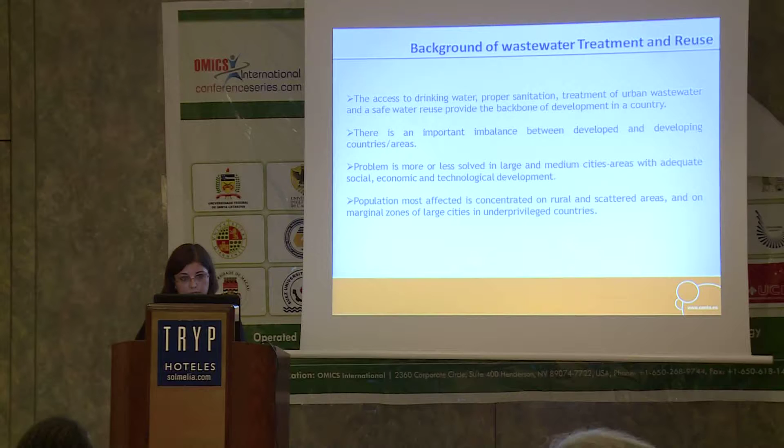Access to drinking water, proper sanitation, treatment of urban wastewater, and safe water reuse provide the backbone of development in a country. But there is an important imbalance between developed and developing countries or areas.

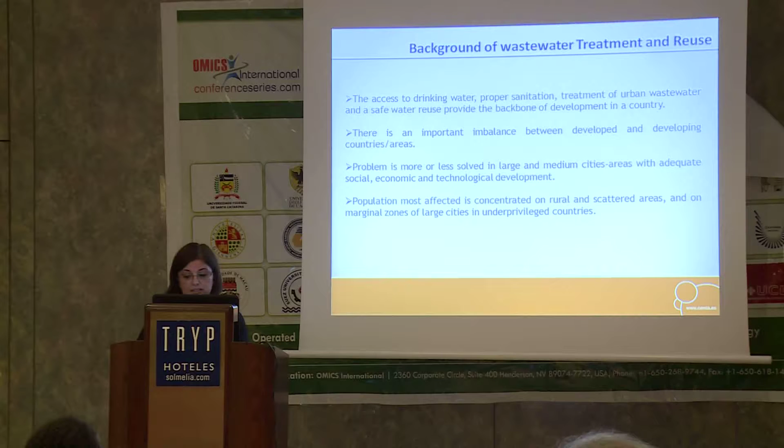The problem is more or less solved in large and medium cities or areas with adequate social, economic, and technological development. But unfortunately, the population most affected is concentrated in rural and scattered areas, or surrounding large cities in underprivileged countries.

If we analyze in detail this situation, for example in large urban communities of developed countries, we have high coverage in sanitation and hygiene. This is very important - availability of infrastructure for wastewater treatment, water reuse, and water reclamation, with good quality water resources, where pollution issues are primarily concerned with amenity values and toxic substances.

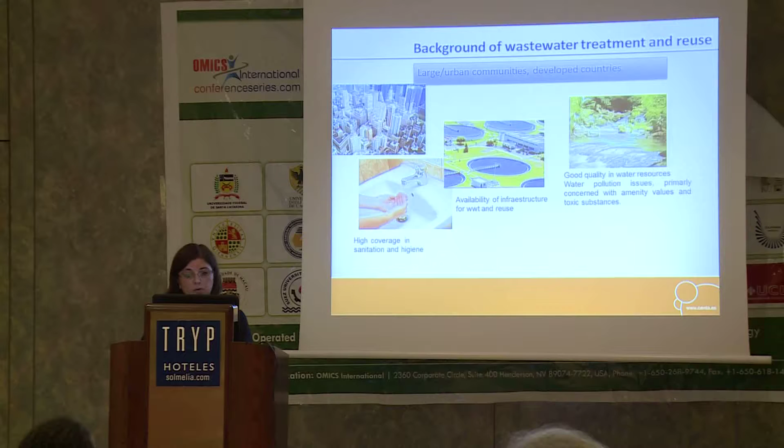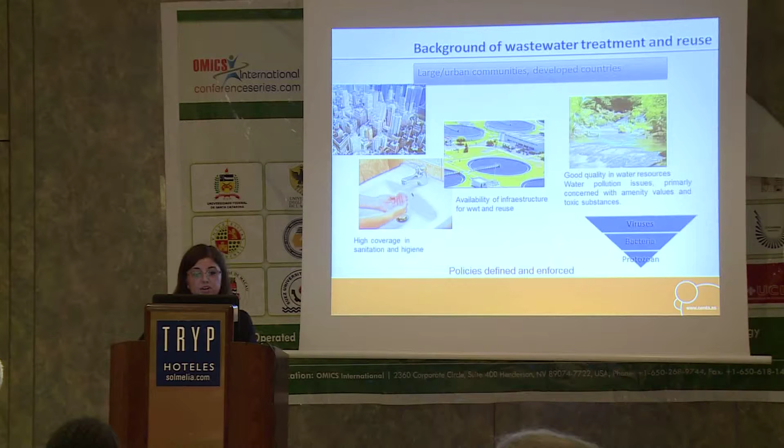If we analyze the health risk related to pathogens in this kind of wastewater, there is a predominance of virus compared to other pathogens. And it's very important that policies are defined and enforced.

If we analyze the opposite situation - small rural communities in developing countries - we have an additional problem: water scarcity that seriously limits food production, along with inadequate sanitation, wastewater treatment plants, and wastewater reclamation plants, causing quality degradation in water resources that produces a risk for public health.

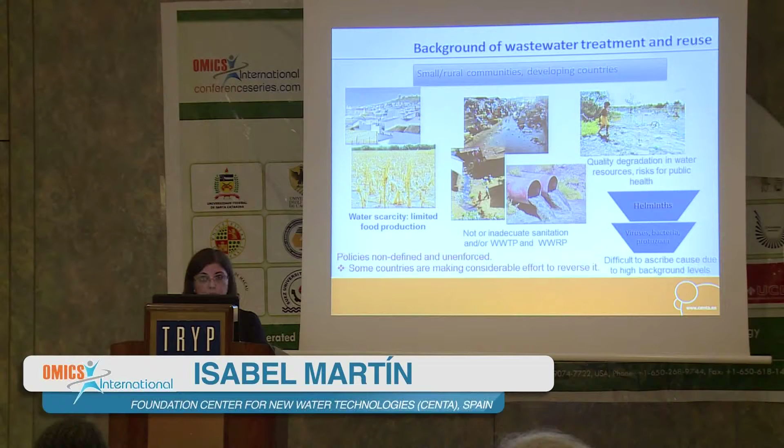When we analyze the pathogen situation, there is high prevalence and persistence of intestinal worms, as well as the presence of virus, bacteria, protozoan, etc. There is a difficulty to ascribe the cause due to high background levels. Related to policies, these are not defined and enforced.

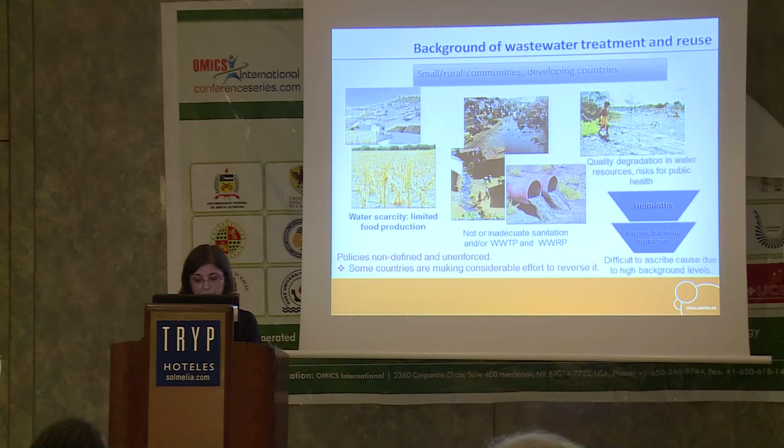Also, there are some countries making a considerable effort to reverse this situation. In the frame of water reuse, I would like to remark on the forecast for water resources.

If we analyze the prediction for the future in water resources, there is a prediction that by the year 2050, approximately 54 countries will be affected by water scarcity and water stress.

So in this context, more and more countries are including water reuse as an additional water resource. For example, in this graphic you can see that there are some countries, such as emerging countries like China or Mexico, or India, that are including water reuse in their water resource management plan.

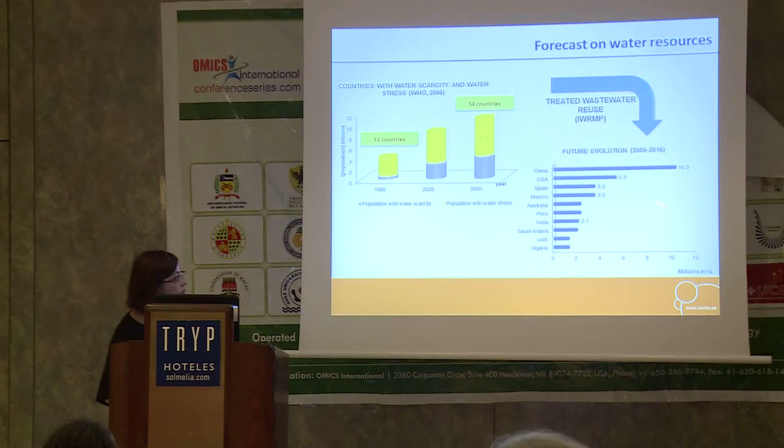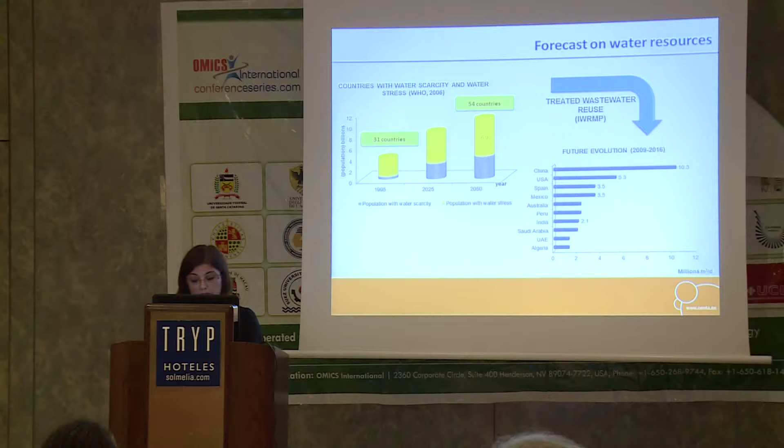Which technology options do we have for wastewater treatment in small communities? First, I would like to introduce a consideration about the characteristics of the wastewater in this kind of agglomeration.

This agglomeration presents high community dispersion, and this produces complexity in infrastructure management. This is a problem when you have to design and implement a wastewater treatment plant in this kind of small community.

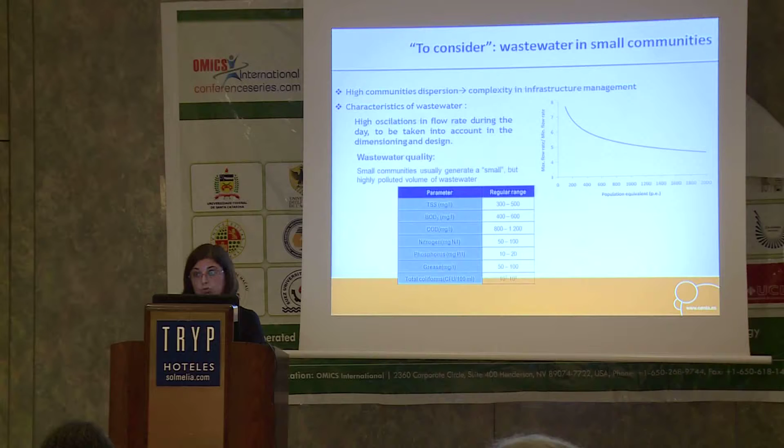Related to the characteristics of this kind of wastewater - in these small settlements a small flow is produced, but it is very, very polluted. So which kind of technology can we propose?

When we are in the frame of small communities, we can work with two kinds of technologies: intensive technologies, such as extended aeration, etc., and extensive or non-conventional technologies. What is the principal difference between these kinds of technologies? The difference is really in the high energy consumption and in the implementation surface.

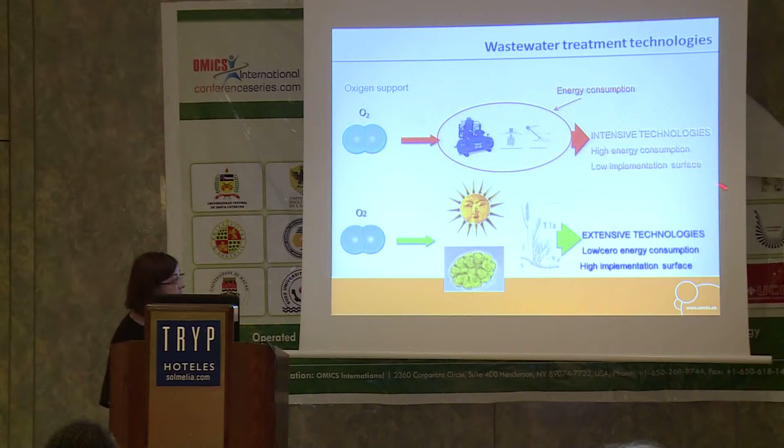For example, intensive technologies like extended aeration present high energy consumption - it's a negative point, but they have a very positive point: low implementation surface. In the case of extensive technology, they need low or zero energy consumption, but they have a very negative point - high implementation surface.

So, most existing wastewater treatment technologies are applied to small settlements, although some will be more adequate or appropriate than others. But really, do we learn from this?

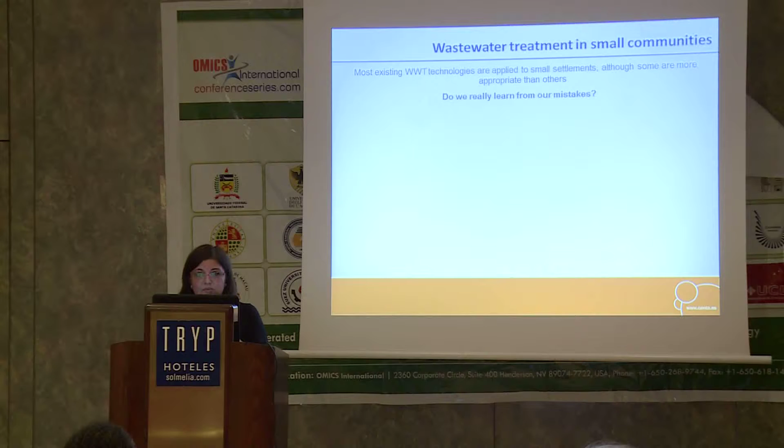Do we really learn from our mistakes? No. Not only in Spain, but all over the world, commonly in small settlements, technologies with high treatment cost have been implemented. For example, you implement extended aeration, and for disinfection you implement ultraviolet disinfection - this is a possible option.

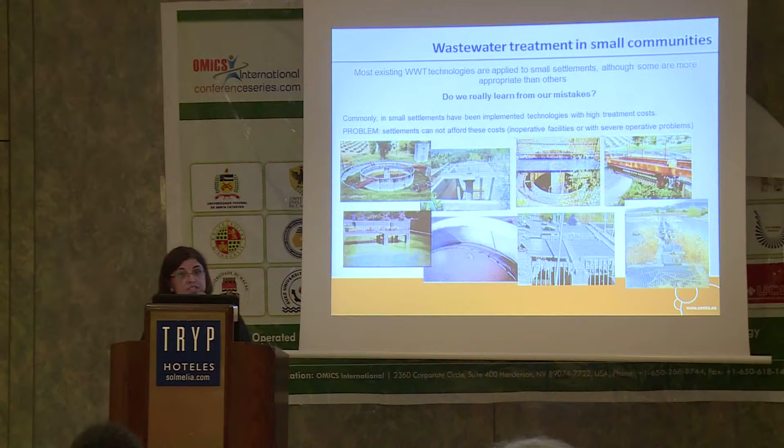What is the problem? The problem is that the settlement cannot afford this cost - it's impossible for them. So the result is an inoperative facility with severe operation problems. Here you have some pictures that I think are very common all over the world.

So which are the most sustainable technologies in the frame of wastewater treatment? Well, we have to look for technologies that follow some requirements: minimum operator time, minimum maintenance, efficient functioning, minimum power consumption, minimum loss of effluent quality, and maximum integration into the environment.

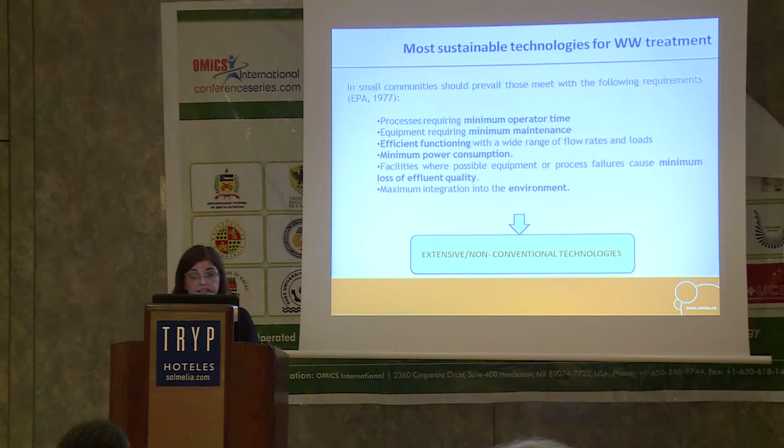So the wastewater treatment technologies that can meet these requirements are the extensive or non-conventional technologies. Now I will present in different slides the possible options for this kind of communities.

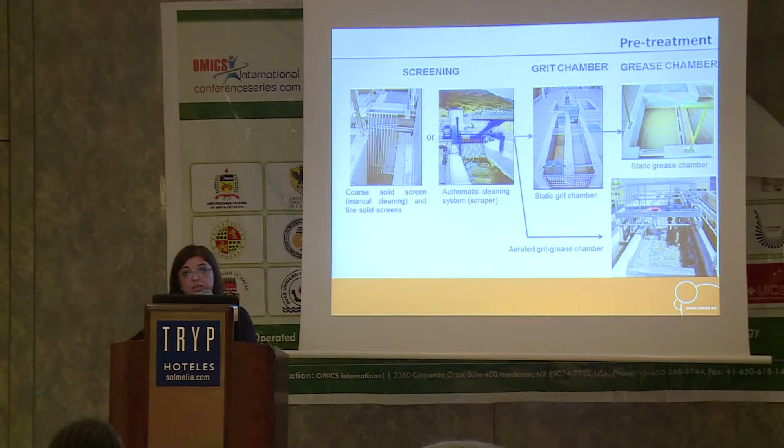In the pretreatment, the first phase of the wastewater treatment plant, is composed of the screening, the grit chamber, and grease chamber. In the screening, we have two options: screening with manual cleaning or with automatic cleaning. This will depend on the budget of the community.

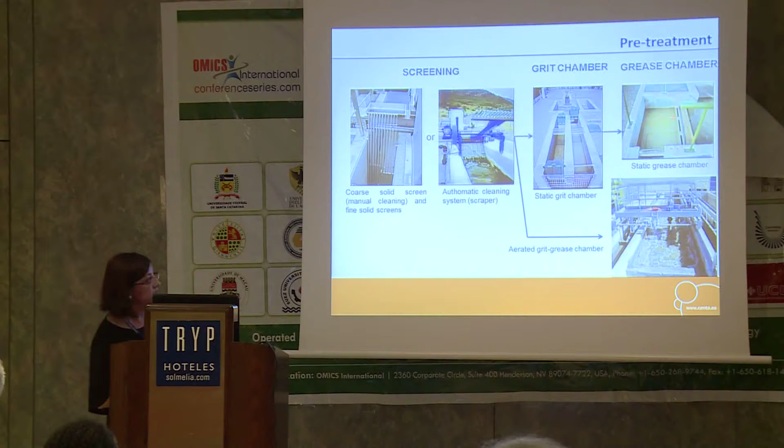Then we have a static grit chamber, very typical in small communities, and the static grease chamber, also very typical. But we have the option of combining these into an aerated grit-grease chamber.

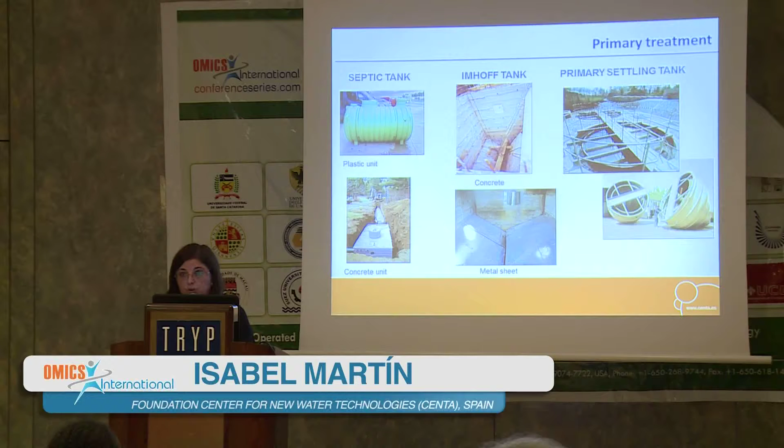The second stage in wastewater treatment, the primary treatment, has different options. For example, we have septic tanks as a plastic unit or a concrete unit. We have the Imhoff tank as a concrete unit or with metal sheets, or a primary settling tank.

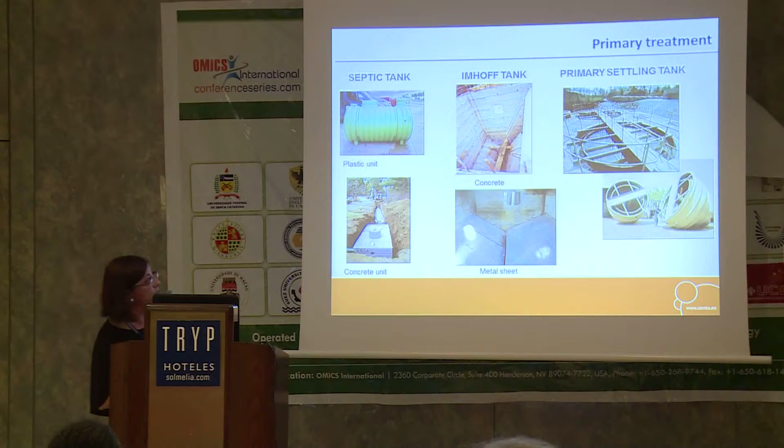About the secondary and tertiary treatment: in small communities, it's adequate to use non-conventional technologies. These extensive technologies are only imitating the natural processes that occur in the environment—imitating the soil, the river, lakes, or natural wetlands.

We introduce the treated wastewater. It's necessary that the wastewater be treated by a secondary treatment before flooding, and the wastewater percolates through the soil. Some physico-chemical and microbiological activities contribute to the wastewater treatment.

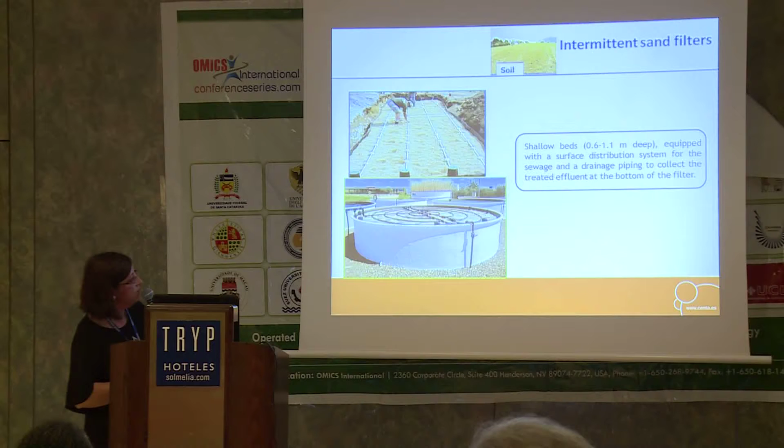Other technology: the intermittent sand filter, imitating the soil, has a shallow bed that presents a distribution system on the surface, and on the bottom presents a drainage piping to collect the treated wastewater.

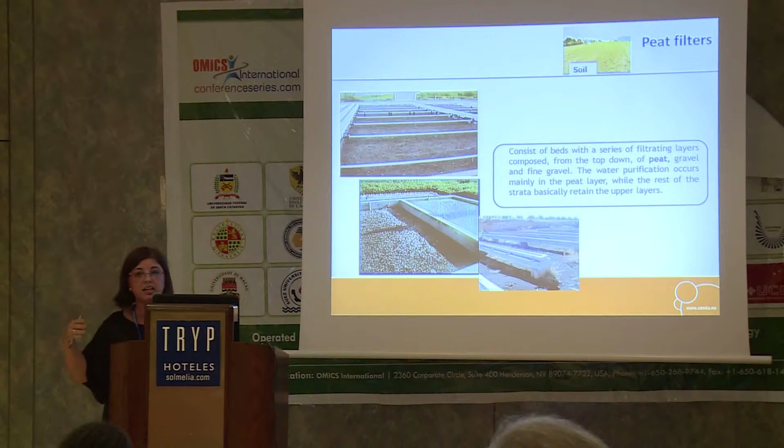A peat filter also imitates the soil. With the peat filter, we have to work with different units, and it presents different layers. On the top is the peat, where the wastewater treatment is produced, and then we use gravel, fine gravel, sand, etc., for supporting the peat.

Constructed wetland: this is a very common wastewater treatment in small communities all over the world. We have different kinds, with vertical flow, with horizontal flow, and the one most similar to natural wetland, the free flow or surface flow constructed wetland. Normally we use a substrate—gravel, fine gravel, sand, etc.—and we use macrophytes.

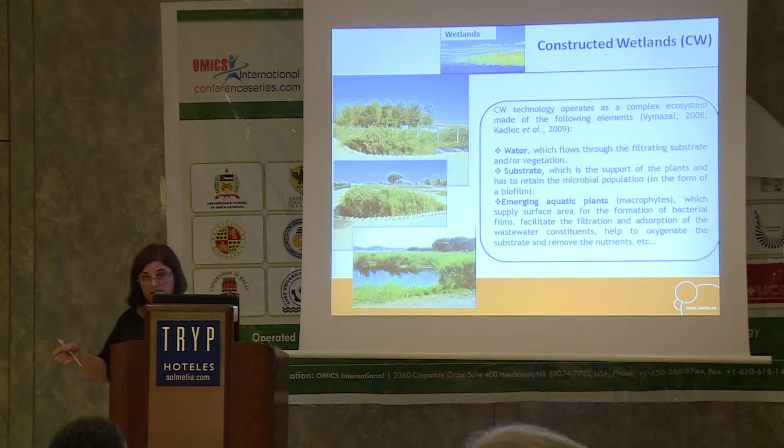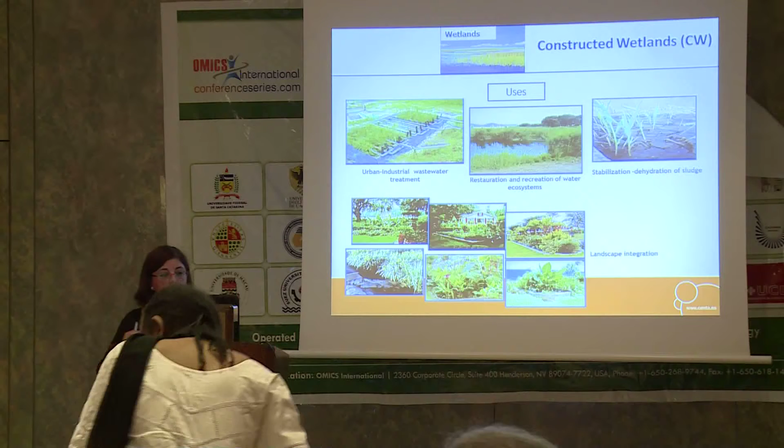Constructed wetlands have several options or uses. For example, we can use them for urban and industrial wastewater treatment, for restoration and recreation of water ecosystems, stabilization and dehydration of sludge, and they present very good landscape integration.

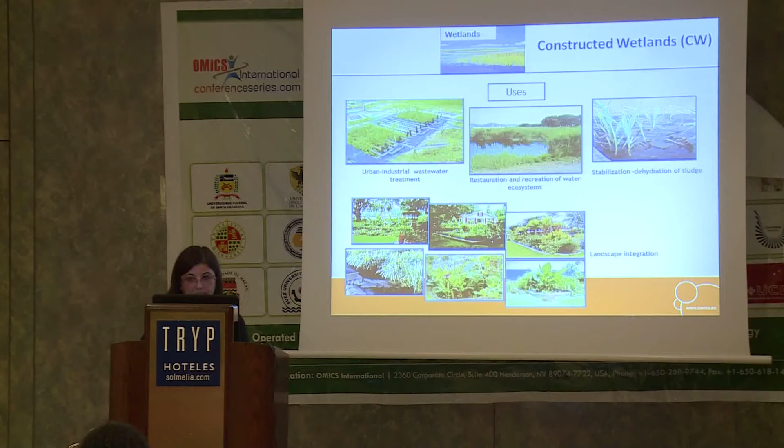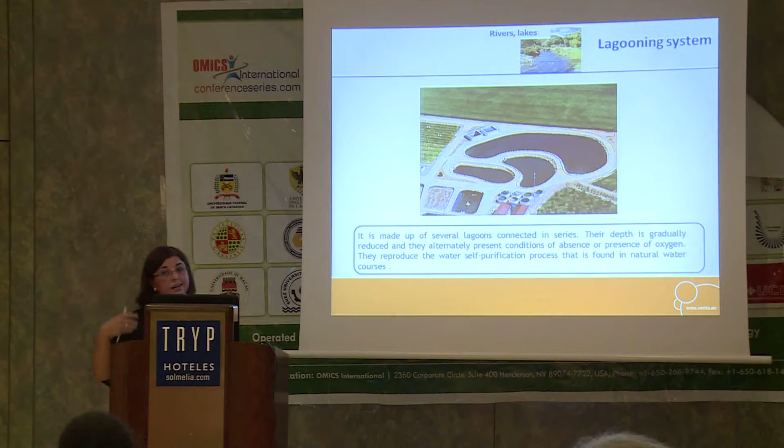Other system, I think you know this perfectly, is the lagoon system, which imitates the river and lake processes. It's composed of three kinds of ponds: anaerobic, where we principally reduce total suspended solids; facultative, where we principally reduce organic material, BOD and COD; and finally the maturation ponds, where we principally reduce pathogens.

Now there are two kinds of technologies that are between extensive and intensive, but have a high application in small communities. This is the trickling filter, or percolating filter—only a tank where you introduce a material for the growth of the biofilm. This material can be stones or other material, but normally we use polypropylene.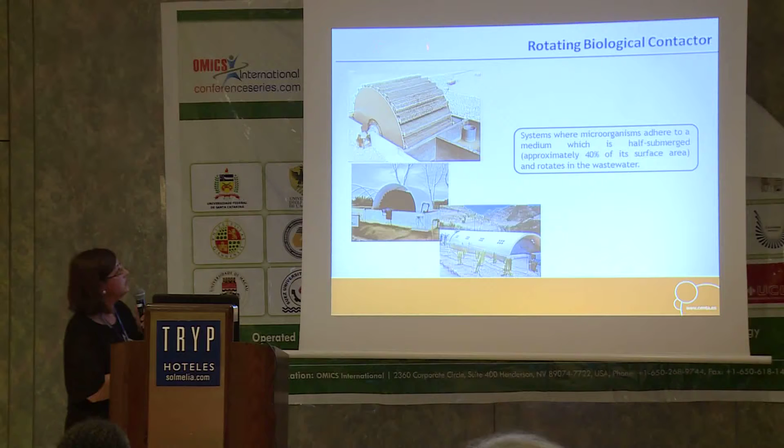When the biofilm is in this space, there is oxygenation of the biofilm, and then when it's inside the tank, the biofilm is in contact with the wastewater, so there is degradation of the wastewater. So the process is oxygenation, degradation, oxygenation, degradation—a very simple process. These are the different options that we can introduce in small communities.

Depending on the area and the needs, different systems will be implemented one on another. What happened in the wastewater reclamation frame? Well, we have the treated wastewater, and now we have to think about reclamation, about reuse.

We have to consider that this kind of wastewater presents a risk, associated principally with the presence of pathogens and other pollutants. Normally, the regulated pathogens are intestinal worms and fecal coliforms, for example E. coli, Salmonella, Legionella—it will depend principally on the final use.

So these pathogens and pollutants produce a potential health risk, and depending on the higher or lower level of wastewater treatment and water reclamation, we can use the reclaimed water with guarantees for health.

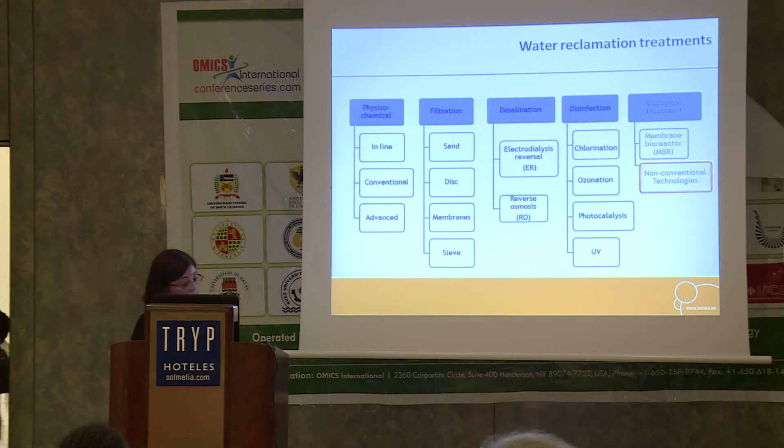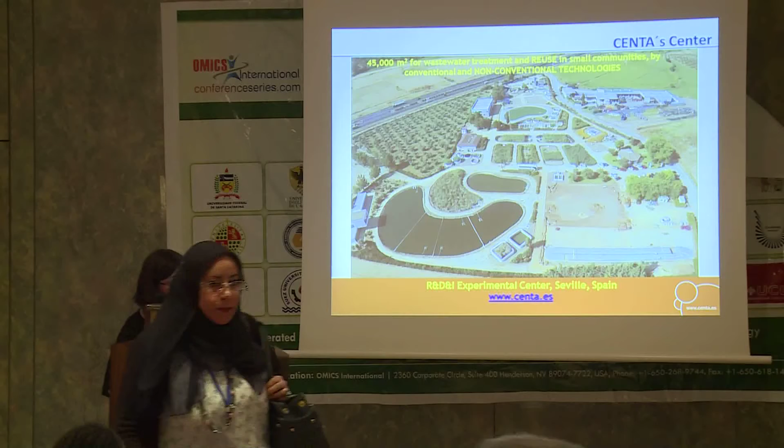So non-conventional technologies can be applied in this frame. Related to the different projects in which CENTA is working on wastewater treatment and principally water reuse, I would like to present some of them.

Here you have an overview of the Experimental Center on Research, Development and Innovation, situated in the south of Spain, in Seville. It covers 45,000 square meters destined for wastewater treatment and reuse, principally for small communities. We have different options and treatments, working principally in a frame between the laboratory and real scale.

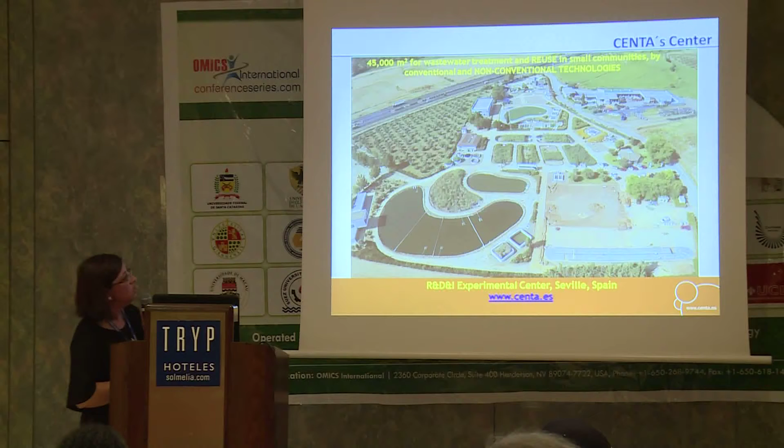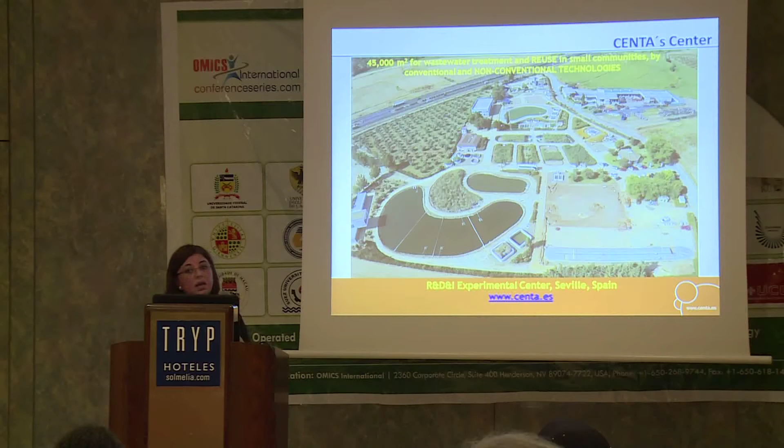We have pilot lagoon systems with different modifications, different combinations of constructed wetlands. We have green filters, sand filters, bioelectrogenic constructed wetlands, plots for water reuse, etc. We also have an area destined for testing prototypes for enterprises—a company can come here and test their prototype.

Some projects related to water treatment and principally reuse: for example, the use of green filters in silviculture for energy production, and emerging contaminants removal for aquifer recharge. In the green filter, we are working with different kinds of substrate.

This conference has been very important for me because I have found other options for filtrating substrate to be used in this kind of technology.

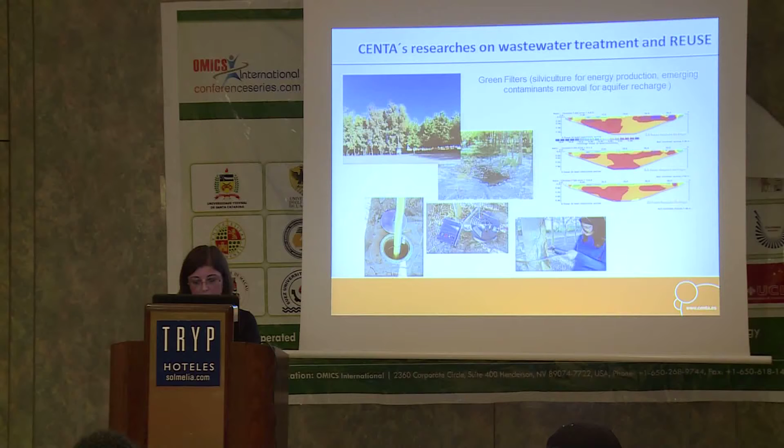We work with treated water in the irrigation of Jatropha curcas for biodiesel production, and treated water in the irrigation of sunflowers for biodiesel production too. We also work with the intensive green filter for energy production, and we evaluate the soil as a reclamation treatment.

The use of permeable reactive barriers for aquifer recharge—this barrier is composed of three materials. On top we introduce palygorskite, in the middle activated carbon, and on the bottom zeolite.

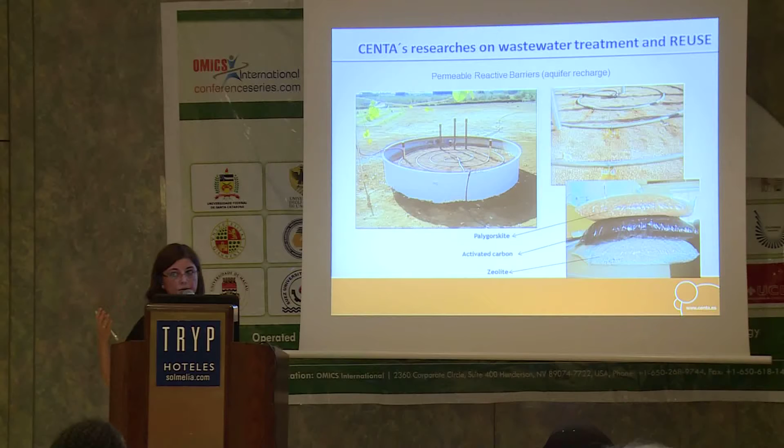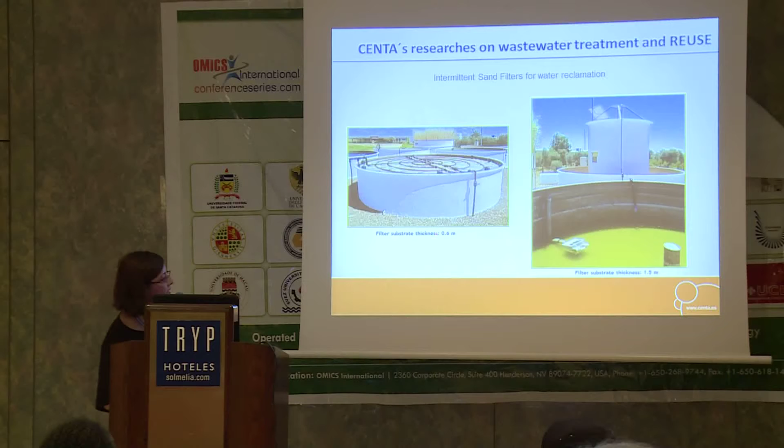But we are looking at other options. The question is to find a very good filtration layer. The use of intermittent sand filters for water reclamation—this is a very good treatment to put at the end of the treatment line. We are looking at different options with substrate thickness in order to improve the removal of E. coli.

The study of nematodes, plant parasitic nematodes, as a factor for consideration in wastewater treatment and reuse. As people working in the water reuse field know, in the standard regulations or guidelines for water reuse all over the world, these microorganisms are not included.

This is a serious problem in irrigation use, because if the wastewater presents this kind of microorganism, it affects the plants, it affects the crops, and this can produce serious damage to the crops.

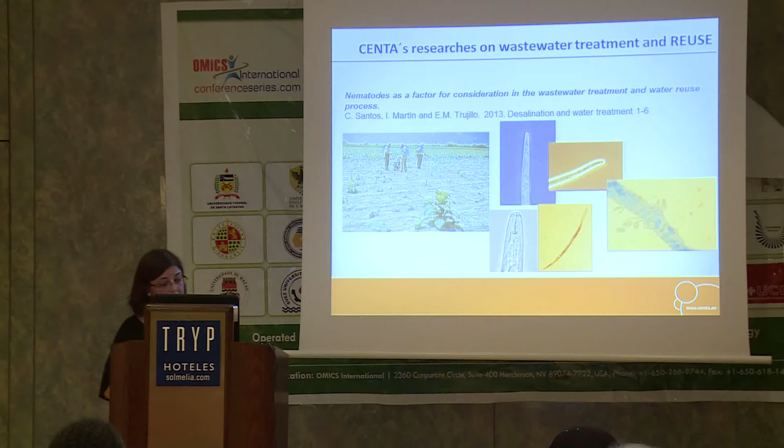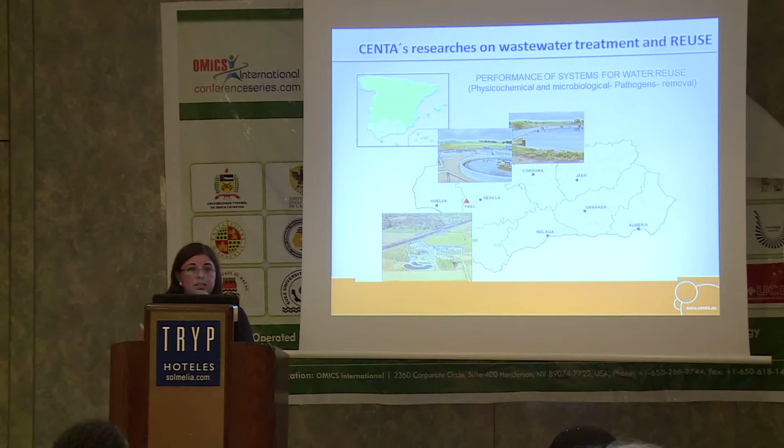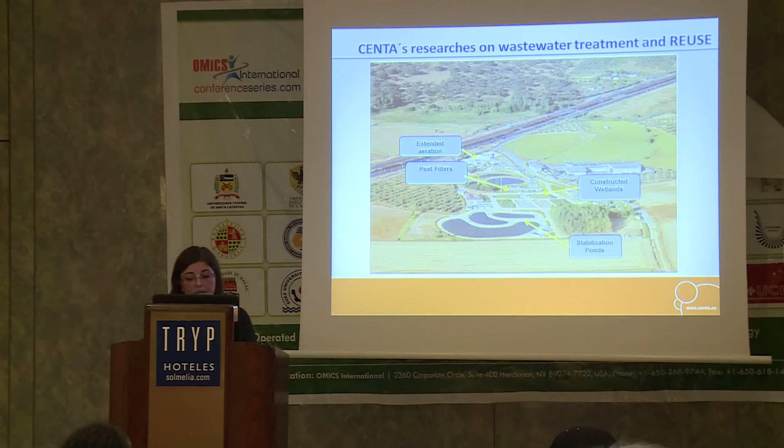In Andalusia, we are working on different technologies in order to improve systems for water reuse in the physicochemical and microbiological frame, principally pathogen removal. At the experimental center, we have been comparing extended aeration, peat filters, stabilization ponds, and different combinations of constructed wetlands.

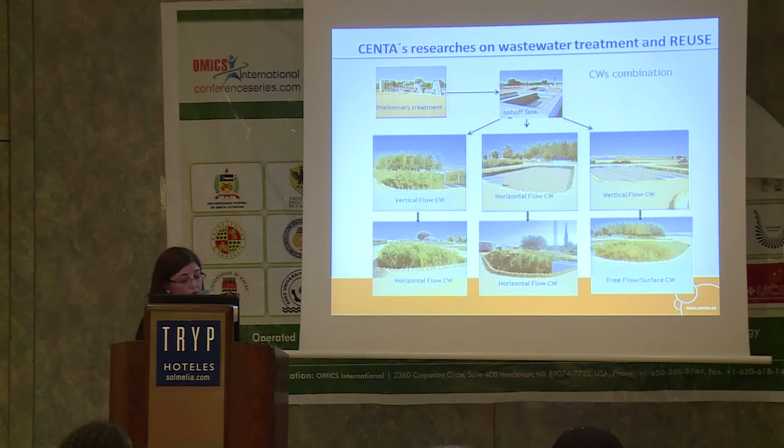This is the line we are working with: constructed wetlands as a secondary treatment, or constructed wetlands as a tertiary treatment. In the frame of Europe, we have been collaborating on different projects.

In this project, life cycle assessment is included again in the wastewater treatment and reuse plan. In this sense, we are working on life cycle assessment within the wastewater treatment cycle, which has different lines.

We have the domestic wastewater treatment line here, and then the water reuse lines, where the final purpose is principally irrigation. But we have other lines too, for example related to microalgae biomass production and electricity energy production.

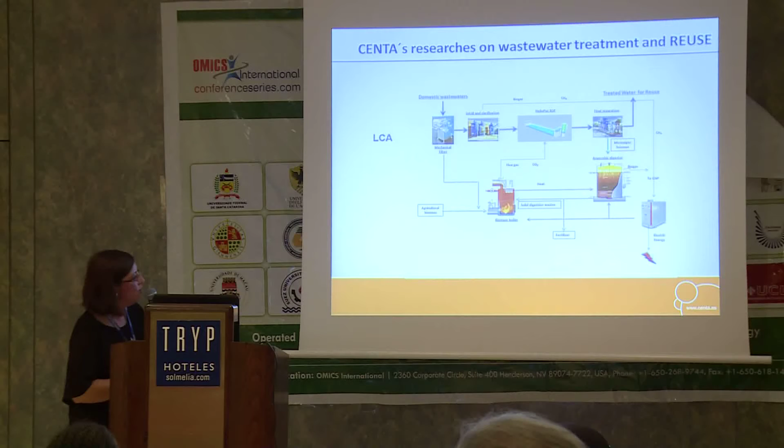Yes, for the fertilizer, etc. In India, we are working in 4 regions supporting consolidation, replication, and upscaling of sustainable wastewater treatment and reuse technologies.

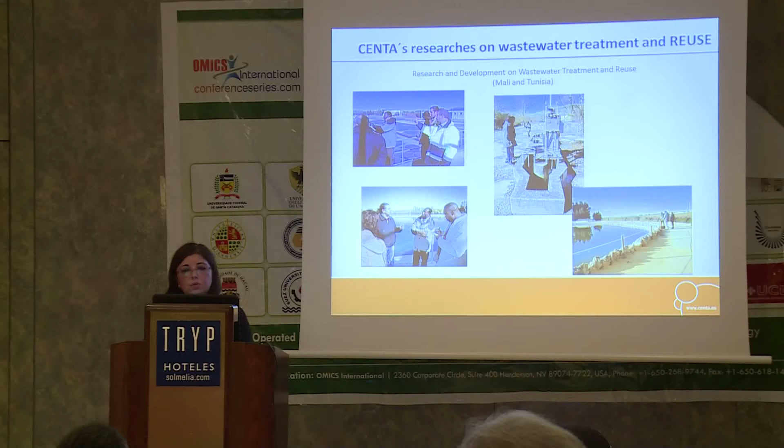We are working in collaboration with Mali and Tunisia in the wastewater treatment and reuse frame. With Morocco, we have a very large collaboration, approximately 20 years.

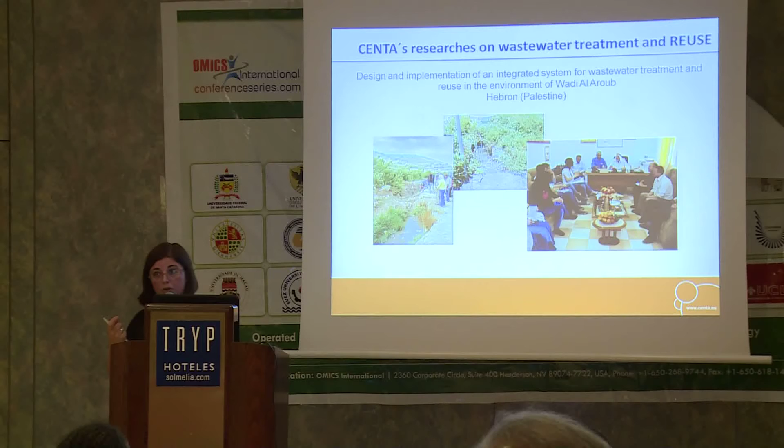In Palestine, we also work. We are starting with basic sanitation, because you have to start with basic sanitation, and then we move into wastewater treatment and reuse.

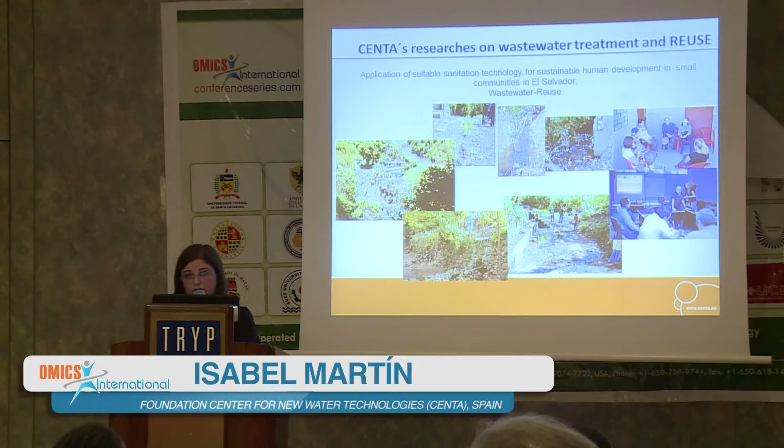In Latin America, we work in several countries. For example, this shows some activities in El Salvador, in a cooperation frame working on wastewater treatment and reuse, but training activities are also very important.

We work a lot on training administration staff, technicians, end users, etc. In El Salvador, for example, we work on sanitation and wastewater treatment, and now we are planning projects for water reuse.

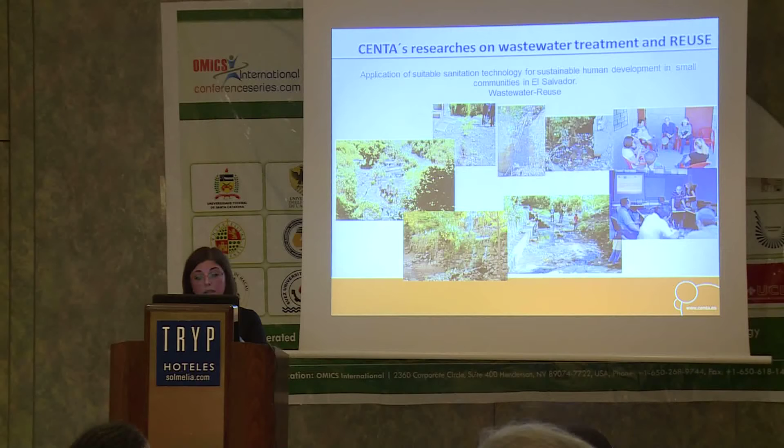As a final conclusion, only two remarks. The limited financial and physical resources for wastewater treatment, the socioeconomic situation, and the context of urbanization mainly affect small communities, rural and low-income areas, creating conditions for unplanned and uncontrolled wastewater reuse.

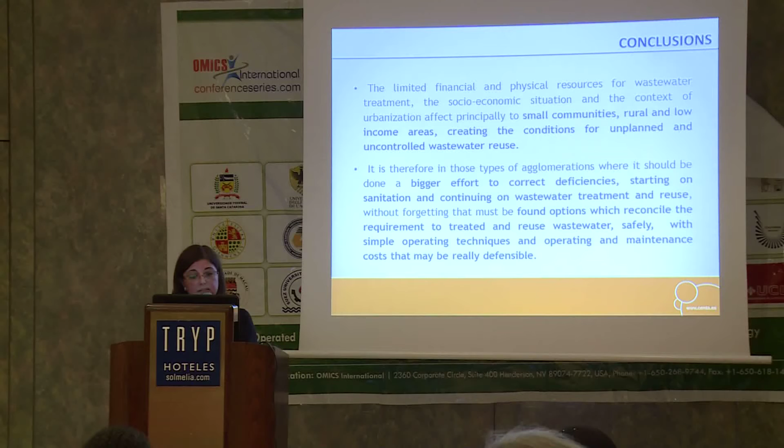Second, it is in these types of agglomerations where we have to make the biggest effort to correct deficiencies, starting with sanitation and continuing with wastewater treatment and reuse, without forgetting that we must find options that reconcile the requirement to treat and reuse wastewater safely with simple operating techniques and maintenance costs that might be really affordable.